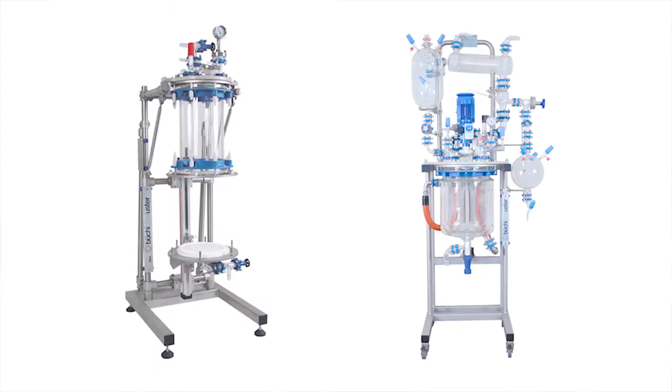This first production batch is typically done in a kilo lab or pilot plant with a batch size of 10 to 100 liters. This step is important, not only because it provides the first scale-up data for later full-scale production, but also because it provides the first material for clinical phase 1 and 2 trials, deciding about the future of a potential multi-billion blockbuster drug.

Every chemist who is responsible for a kilo lab faces several challenges. First, as a chemical engineer, because the laboratory type synthesis of a drug product must be adapted to the more production-like technology of a pilot plant. Second, because of the 10 to 50-fold increase in batch size, process safety requirements increase substantially.

And finally, since the product is used on humans in clinical trials, the strict and detailed qualification, validation, and documentation requirements of the health authorities must be fulfilled. All this must be considered when designing an automation solution for a kilo lab or pilot plant.

Because the chemical production process is in its early stage of development, it is not well defined and prone to surprises. At the same time, the quick succession of different products does not permit the adaptation or optimization of the control software to each product. For some operations, working on an open reactor is unavoidable. Examples are sampling of reaction mixtures or seeding of crystallizations. Under this condition, a strict adherence to the ATEX regulations is mandatory.

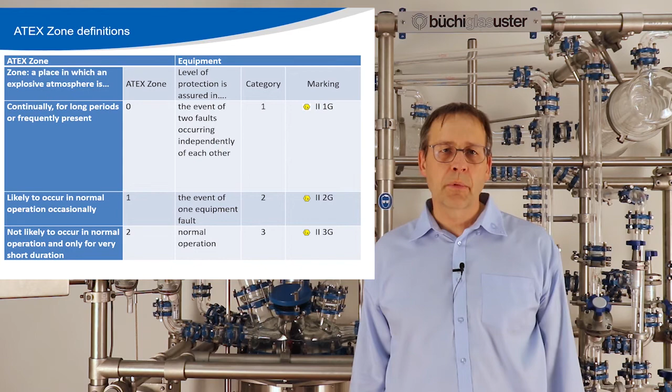While in large production-type vessels the inside of a reactor can be kept completely oxygen-free, this is not always possible for small-scale reactors as used in a kilo lab or pilot plant. Solids are often dosed through the open handhole or the reactor is drained into an open flask. This places a kilo lab reactor into ATEX Zone 1, which is defined as an explosive atmosphere likely to occur occasionally in normal operation.

In order to improve the inherent safety of the reactor, all metallic parts of the reactor need to be grounded. In addition, glass parts can be coated with a conductive coating to reduce the risk of electrostatic discharges, and today even conductive PTFE gaskets can be supplied with the required food-grade certificates, which is important for pharmaceutical production. If reactions with hydrogen are planned, some of these measures are mandatory. For automation, this means that all sensors, valves, pumps, etc. must have the same or better ATEX rating as the whole reactor.

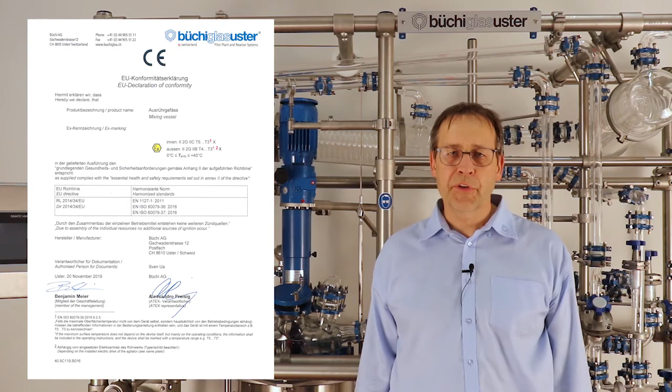While automation cannot mitigate the danger of electrostatic discharges, it can provide an additional level of safety by preventing or shortening the time where explosive atmospheres are present. The Büchi control system will execute a defined inertization process on the push of a button and will maintain a constant nitrogen overpressure inside the reactor, taking the burden of vigilance from the operator. If desired, it also can be easily extended to respond automatically to external alarm signals generated, for example, by hydrogen or solvent detectors.

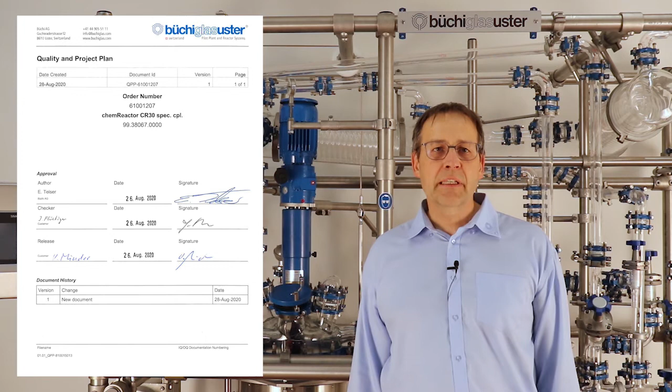If a reactor is used to produce active pharmaceutical ingredients, the control system must comply to the requirements of electronic data acquisition, generally known as CFR 21, Part 11. While a full-blown computer system validation can be a long and expensive process, by focusing on the specific needs of a kilo lab, the validation can be reduced in scope and depth.

For example, it is perfectly feasible to keep the lab protocols on paper and use the data acquisition only to read out missing data points for experiments running overnight. Since no external data storage is involved, validating such a system will be easy and does not require special expertise in computer system validation.

Since the Büchi control system is based on a Siemens PLC, it can be extended with user access management, external storage, up to a full-blown data archiving system based on an enterprise-level database. Of course, Büchi will provide the required GMP installation qualification and operational qualification services if required.

Functional robustness, ATEX compliance, and adherence to GMP standards are the three cornerstones of a successful kilo lab automation project. Büchi AG can provide a turnkey solution, and we are happy to design one which fits exactly your requirements.

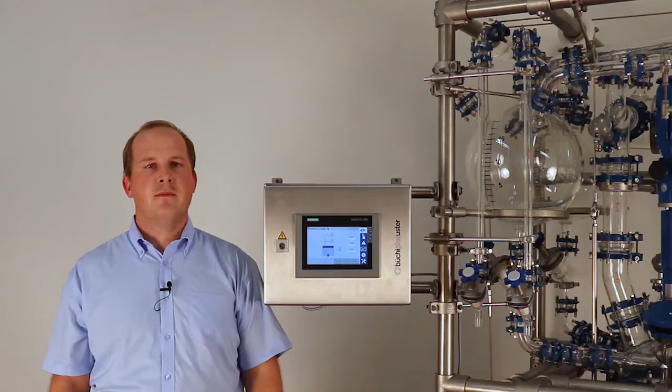Hello, I'm Fabian and I would like to show you our automation concept for Büchi reactors. The Büchi control system, also called BCS, is a modular-based system. Its individual functions allow us to automate almost any system. Thanks to the control system, complex process sequences can be conveniently and safely controlled and monitored via an operating panel. In addition to that, complex processes can be completely automated with a recipe control. Let me show you the BCS a little bit closer.

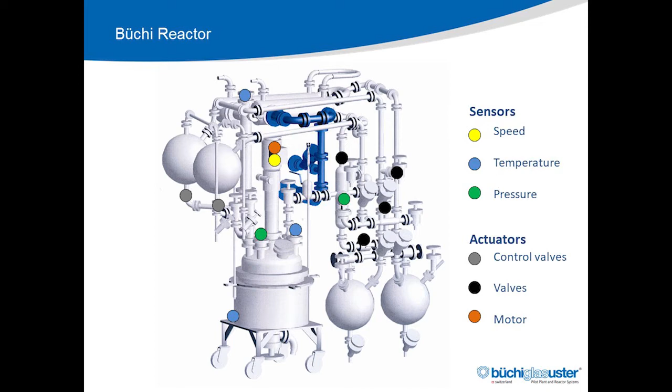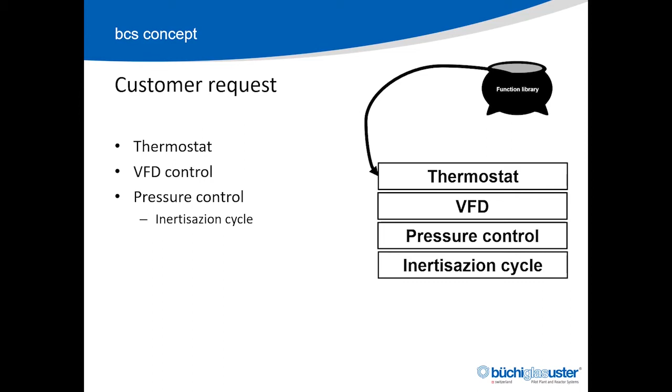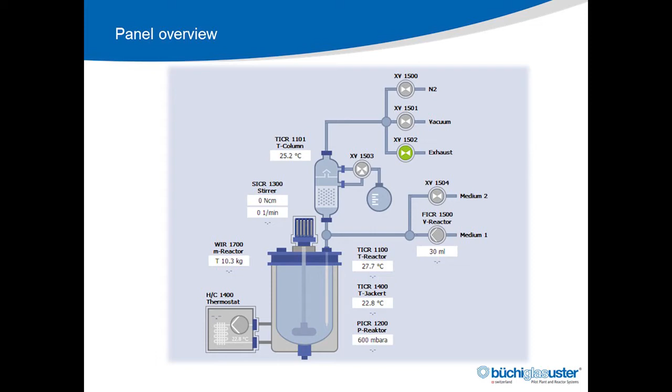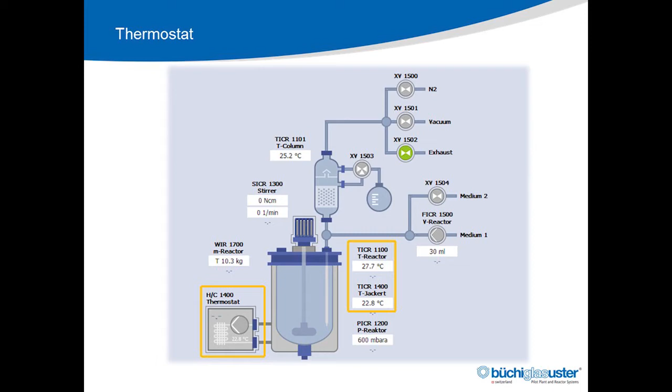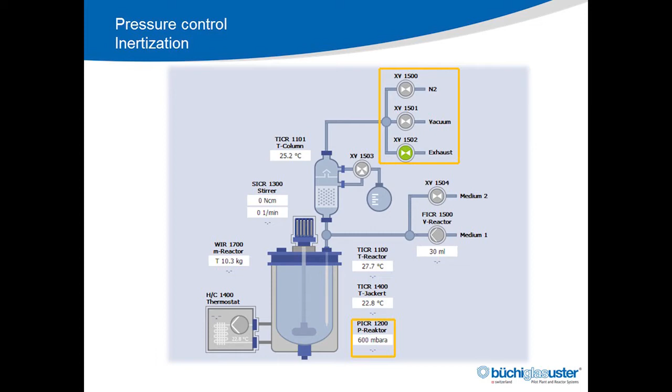We have a thermostat control. The set point is referred to the internal process temperature, or alternatively to the jacket temperature. The motor is controlled by a frequency converter. The speed and torque are displayed next to the motor. With the 3 valves and the pressure transmitter, we can control the pressure and also do inertization cycles, fully automated.

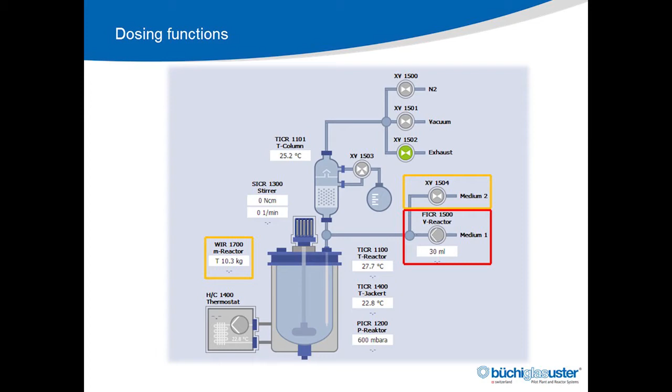2 dosing systems were used. The valve in combination with the scale gives the first dosing function regulated by mass. The second dosing function consists of a liquid dosing pump. The accurate dosing pump can calculate the total amount, which allows accurate dosing with just one piece of equipment. Thanks to the flexible dosing head, the flow rate can be easily changed via the control system. The temperature probe on the top of the column together with the reflux valve allows a constant reflux.

Now I would like to show you how to operate the control system. You'll see that thanks to the simple and logical structure of the interface, no long training or education is required to operate the system. On the main screen we have an abstract view of the system and all sensors and actuators. On the right side we have the navigation buttons. They allow you to jump to the most used information. In the alarm menu, all active alarms or errors are shown with a description.

Let's simulate a defective sensor. After the defect is detected, the triangle color changes to red and the error message is displayed.

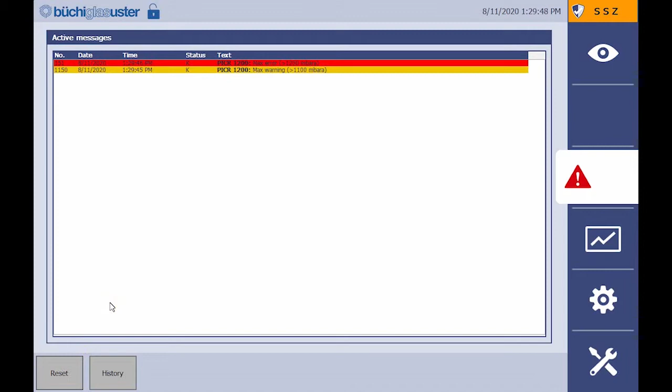The difference between a warning and an error like this is that the error has to be reset after the system is fixed, while a warning will disappear after the problem is solved. The history shows all past warnings and errors and also some information which can be useful, like when you started a manual data logging.

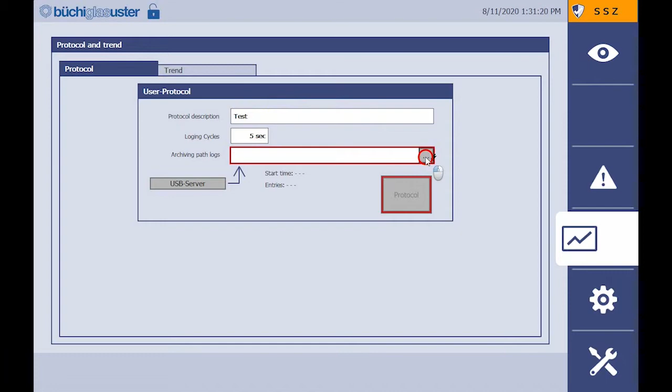The protocol and trend menu is used to start a manual protocol logging or to check the measured values. The system has an internal data logging which logs the data in the background. So if you need a specific protocol for a test run, the easiest way is to use the user protocol. You can give the protocol a specific name and choose the logging cycle. You also have to set a path where the protocol will be stored.

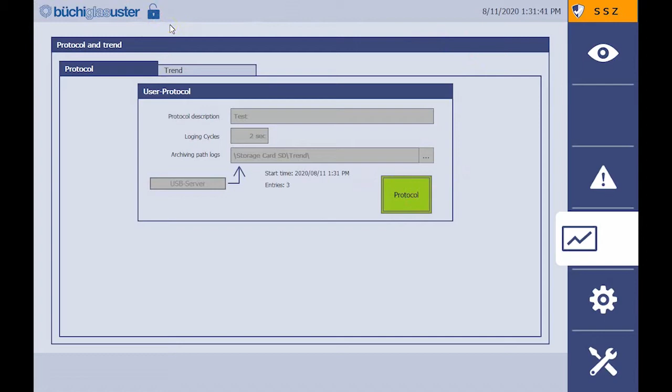If an ATEX panel is used, a USB server is installed in the control cabinet outside the ATEX zone. When the data logging is active, a symbol is shown on the screen. The measured values are visualized in the trend screen. To have a better view, you can zoom in by pressing the plus symbol. The enlarged graph is only an extract and not live.

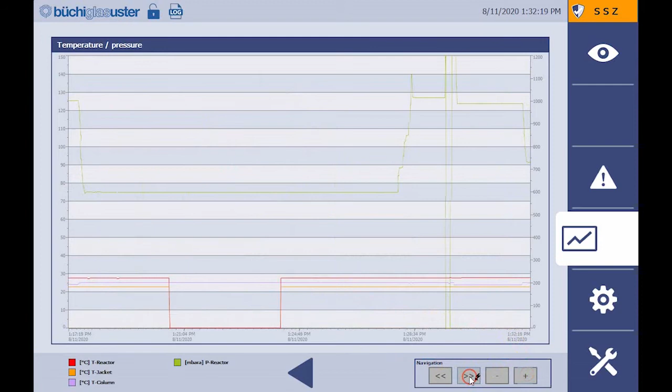In the settings menu, we can change some basic settings like time and date. Also, the brightness and language can be changed on this page. Next to the basic settings, system-specific settings can be made in the service admin area. Next to it, there is a small diagnostic menu which shows the status of the PLC and the router settings, which are set up for the integration of the system into a customer network, or the VPN settings for remote maintenance.

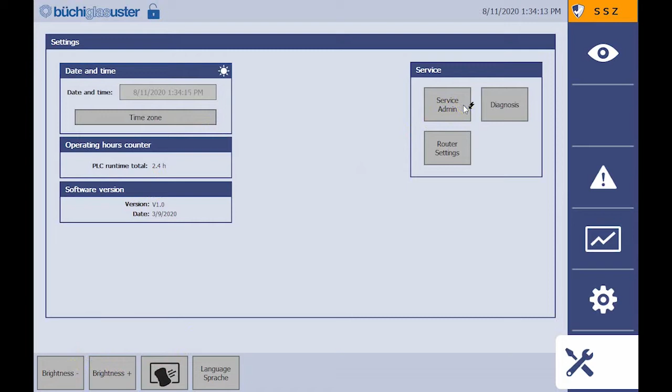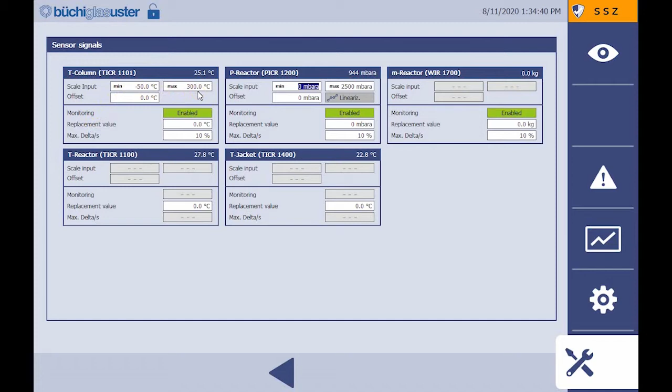The service admin page serves a lot of different specific settings. I'll quickly show you the most interesting settings. The sensor signals can be defined in the sensor signal menu. Next to the range, the linearity can be set wherever possible. Also, a fixed offset can be set. In the sensor limit menu, you can define a warning and error limit for each sensor.

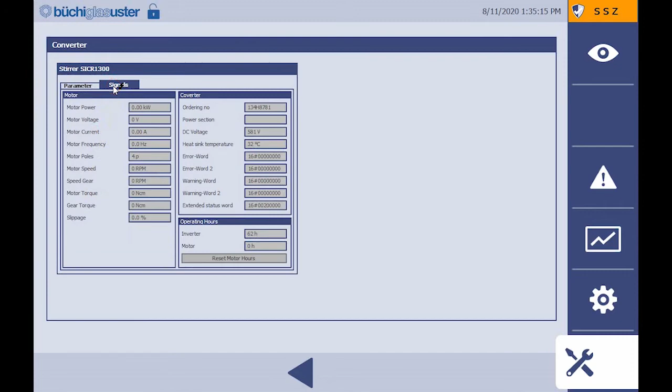The converter menu allows you to change the frequency converter parameters. The parameters should only be changed if the motor has changed. In the scale menu, the Siemens Siwarex scale can be adjusted and controlled.

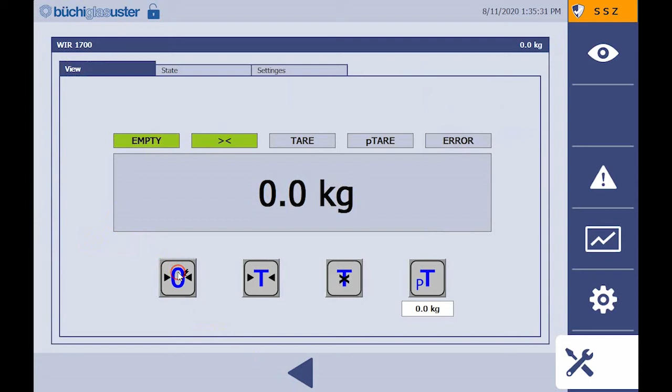The system includes different access levels, which can be changed in the user administration. New users can be added in this menu. Depending on the security level of the user who is logged in, you can only add new users with the same or lower rights. For example, an operator can't create a new user with administration rights.

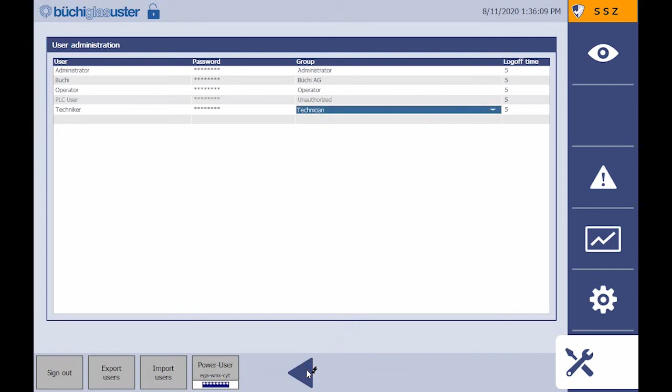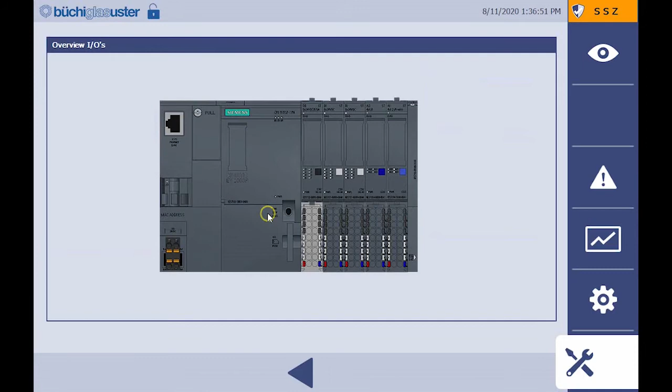You could also calibrate the touchscreen if necessary. The I/O menu allows you to have a look at the specific connections of the PLC, and if needed, you could also force a signal.

Let's do a typical test run with the control system to show how it works. We will simulate a mixing process which includes the inertization of the reactor and afterwards a dosing of two mediums. Stirrer and thermostat are also needed in these steps. By pressing on the motor symbol, we can start the stirrer and set it to 50 RPM. We do the same to start the thermostat. We'll heat the jacket up to 50 degrees.

Before we can dose the material, we need an inert reactor. Because inertization is used on the reactor, we have to press on the reactor symbol. Here we see all functions which refer to the reactor and have more than one sensor or actor. So let's set up the inertization function with 2 cycles. The vacuum should be 600 millibar. Afterwards, we'll flush the reactor with nitrogen up to 1050 millibar overpressure.

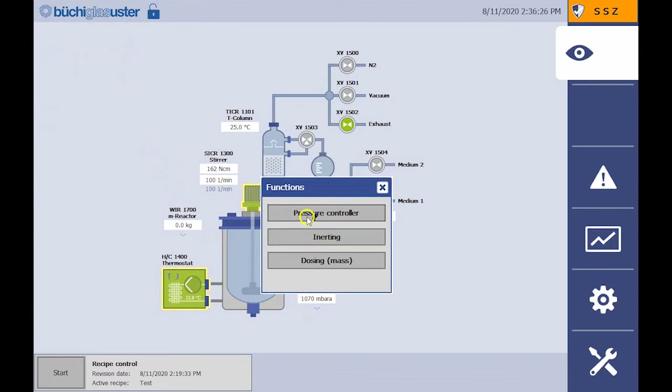After starting the function, the hand symbol indicates a running function of the reactor. The inertization cycle is now running and displayed in an information window. For a good mixing result, let's change the speed up to 100 RPM. Also, we do the mixing under vacuum. So we'll click on the reactor symbol where the pressure control function is located. Let's set the vacuum to 700 millibar with a hysteresis of 20 millibars and start the function.

In the next step, we need a bit of our liquid medium 1. So we click on the pump symbol and set the volume to 30 milliliters and the flow rate up to 100 milliliters. After starting the function, the dosing pump starts and will stop when the preset volume is reached.

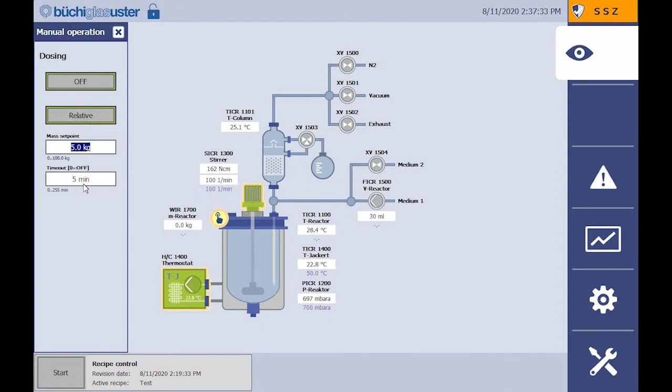We now need the medium 2. This dosing function includes a valve and a scale. The reactor is loaded in load cells to get the weight. The system will open the valve until the preset amount is dosed. So let's dose 5 kg relative into the reactor.

After a little mixing time, we are finished with our process and have to stop all running functions manually. If this process is needed, for example every hour, it's kind of annoying for the operator to do these steps manually. Therefore, our recipe control is the best choice you can make. I'll show you now how you could set up the manually done process in our recipe control.

First, we're going to the recipe window. On this page, we see the actual recipe which is loaded. Also, we have the editor for recipes and could import and export recipes. Let's write our own new recipe by clicking on the drop-down menu and click in the first empty line. The software will now generate a new recipe. Now we can click on the Edit button.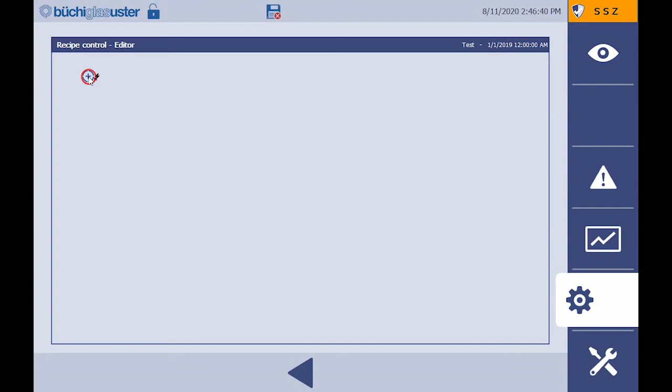At first we want to rename the recipe to Test. After changing, the disk symbol appears to show that the changes are not saved. Now we add our first recipe line. The BCS has a standard 3 parallel functions and 20 steps per recipe.

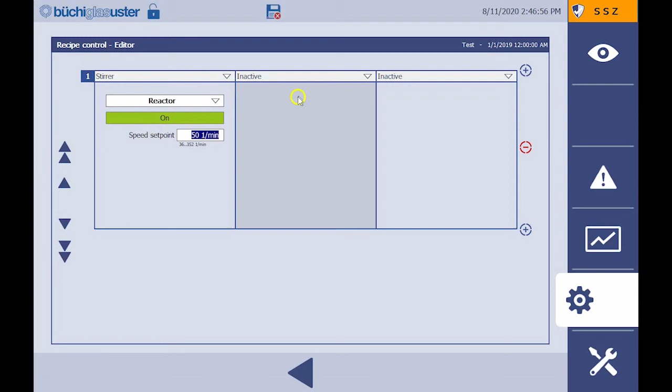So first we'd like to start the stirrer. I have to choose which stirrer I would like to start. In our example we just have the one on the reactor. Now we have to say if the motor has to turn off or on. We turn it on with 50 RPM. Next to the stirrer we also would like to start inertization at the same time. So let's put the inerting function of the reactor and do the same settings like before.

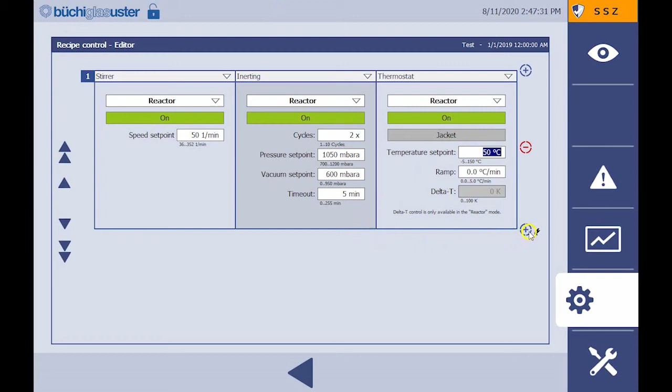Also we want to start the thermostat with a jacket temperature of 50 degrees Celsius. So the recipe control system would now start all these 3 functions and wait until every function is finished. So the stirrer and the thermostat function would be immediately ready, but the inertization function has to be finished until the control system goes to the next line. Next step would be to increase the stir speed and start pressure control.

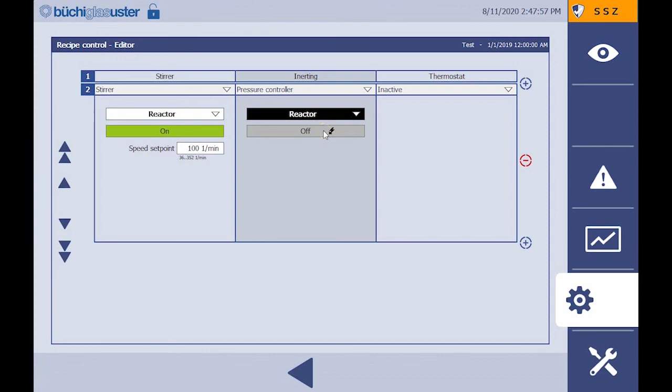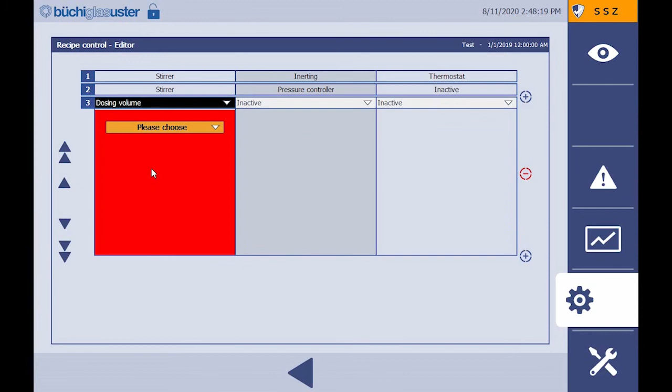After the vacuum is generated, the system will go to line 3, where we start the dosing function with the pump. We choose the dosing volume function of the reactor and set the 30 ml with a flow of 100 ml per minute. Because we want to make sure that all material is in the reactor, I'll set the timer with a few seconds delay.

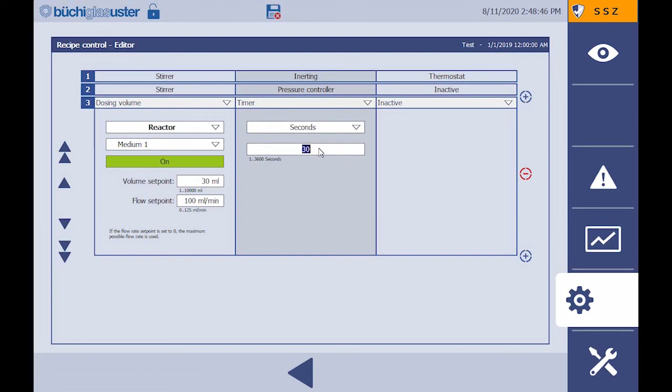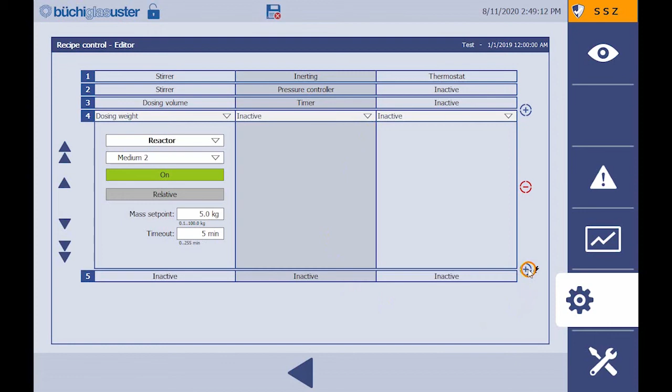After that, we need the dosing with the scale. So we choose this function and set the parameters accordingly. So now our process is already finished. So we add a last line to make clear that the recipe is finished. The function program end will turn off all functions. Let's quickly check every line. Well, that looks good.

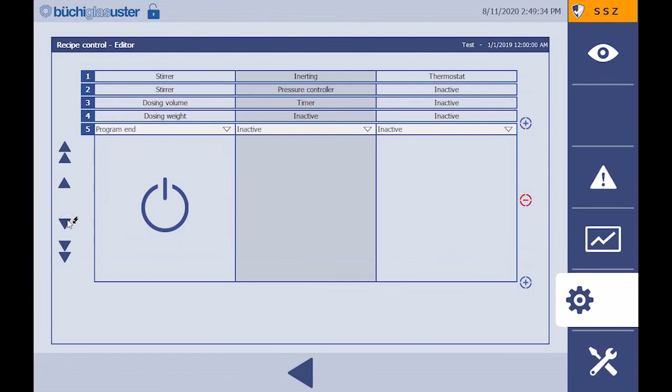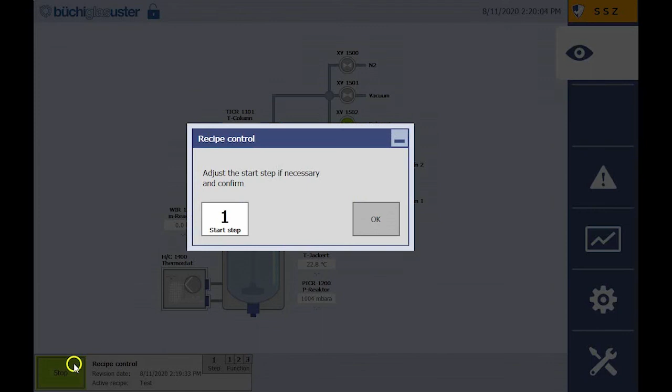We now have to save the recipe. When it's saved, we can load the recipe into the system. Now we are able to run the recipe from the main screen. We now can start the recipe by clicking on the Start button. The system will now ask on which step we would like to start the recipe. This can be useful if you have to stop a recipe because of an issue and you don't want to start the recipe from the beginning. But now we would like to start the recipe from the beginning, so we let it start at step 1 and push OK.

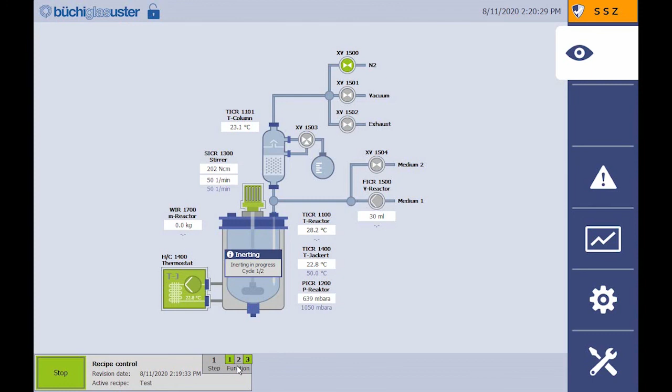Now the function of line 1 of the recipe starts immediately. We can see that the stirrer and thermostat are on and the inertization cycle runs. On the bottom we see which function is already done by the green indicator and which is still proceeding. After the inerting function is done, the pressure control will start and the stir speed is increased to 100 rpm. After that, the dosing pump starts and the countdown of 30 seconds begins. Now the dosing valves open and the system doses until 5 kg is reached.

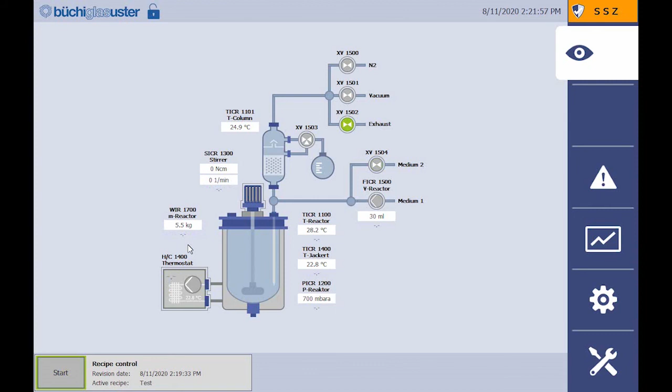Now we are already finished with the recipe. We could now do the same process again and again. With the recipe controller you're always sure that the process is the same quality and you won't have the human influences. It also gives you the chance to be more productive and you don't have to waste your time by pressing buttons on the control system.